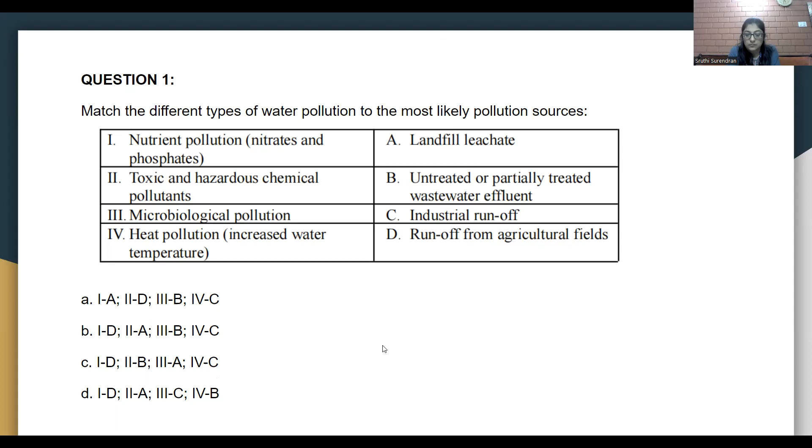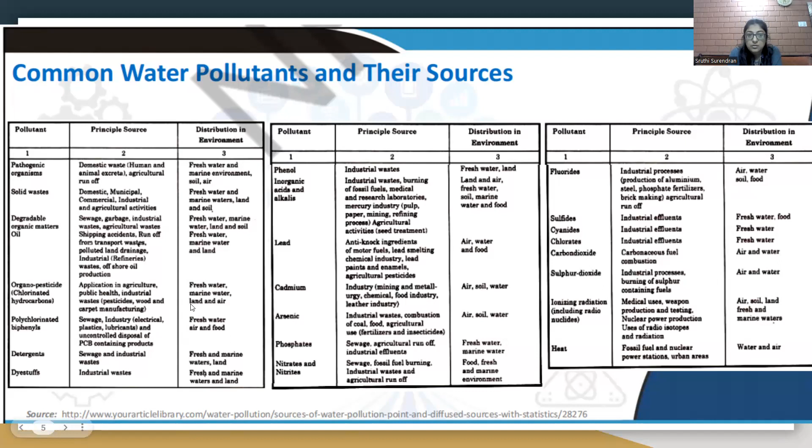Okay, I think I'll move on to the solution part of it. If you see here again in the lecture materials, there's a table of pollutants showing what is the source of pollutant and what kind of pollution it is causing. So nutrients like nitrates and phosphates are mainly coming from fertilizers and pesticides. So the main source of this pollution is the runoff from agricultural fields - when we use fertilizers in agricultural fields and it rains, this rainwater flows and washes off all these fertilizers, then flows into a river or nearby water body, resulting in pollution of the water body by the contents of these fertilizers, which most of the time is nitrates and phosphates. So the first option is going to be associated with D.

Toxic and hazardous chemical pollutants can result from landfill leachate. Landfill leachate occurs when there's a huge plot of area where all waste is dumped - plastic waste, food waste, whatever people collect from houses - accumulated in a particular plot. When it rains, this rainwater goes through the landfill, either seeping down into the soil or flowing out. This waste comprises a lot of chemicals which are hazardous and toxic. This is what is called leachate.

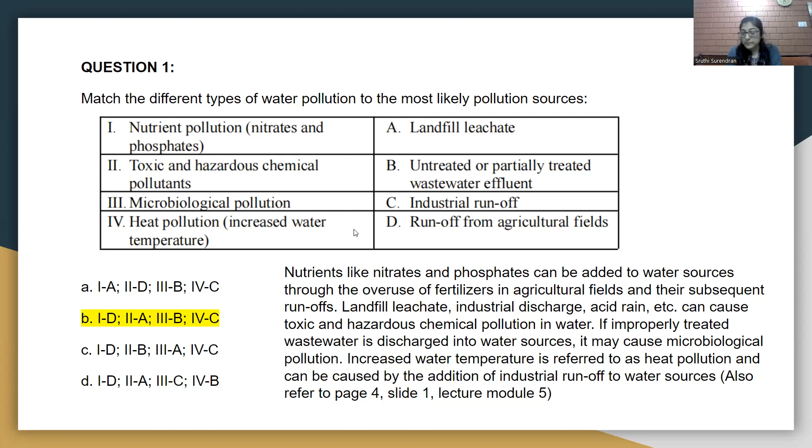So the third one is going to be B. Heat pollution is when the temperature of water increases because of some pollutant. This mainly occurs due to industrial runoff - when water is used as a coolant, it takes up a lot of heat. If this water is directly let out into a stream or river, it drastically changes the temperature at that point of release, affecting aquatic life. A drastic change in temperature is also a type of pollution. So heat pollution is associated with industrial runoff, and the option provided is B, which matches with all of them. I hope you understood the association.

The next one is: on the basis of degradation nature, water pollutants can be classified as? From this question, you can understand there are many bases for classification of water pollutants.

Kiran has said it's A. Any more answers? Vijay, Sangamitra, Ravi, go on, just make a guess, or if you know it, give the right answer. Okay, I don't see much answers coming up, so I'll move to the solution.

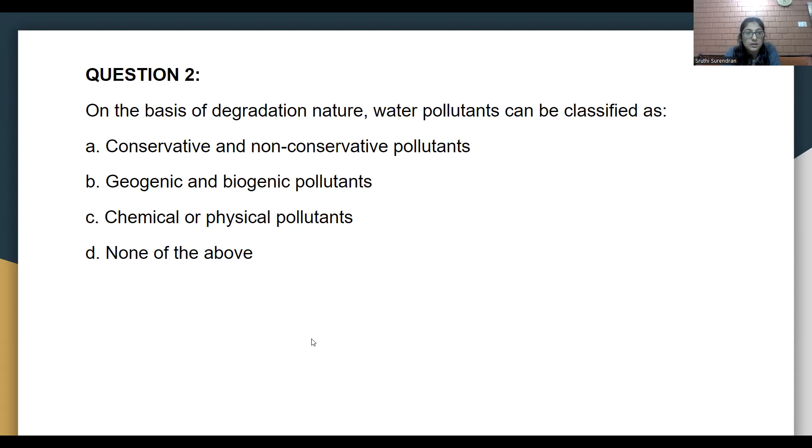Water pollutants are classified on certain bases. Here we are talking about three kinds of natures or types of water pollutants: one classified based on the sources of the pollutants, from where it is generating; the next based on the state or characteristics of the pollutant, whether it's physical, chemical, or biological; and the third is based on degradation nature, whether it gets disintegrated or does not disintegrate.

Based on pollutant sources, there are industrial pollutants resulting from industrial activities - heat pollution is one result of industrial pollutants, along with heavy metals and other contents coming from industries that also pollute water. Next are agricultural pollutants, with nutrient pollutants majorly falling under this category. Then there are urban pollutants, and landfill comes under this urban pollutants category.

Then there are natural pollutants which exist in nature itself - when existing in a moderate level or quantity, it's not a problem to the environment. But if it comes in excess of the required quantity, then it will also be considered a pollutant.

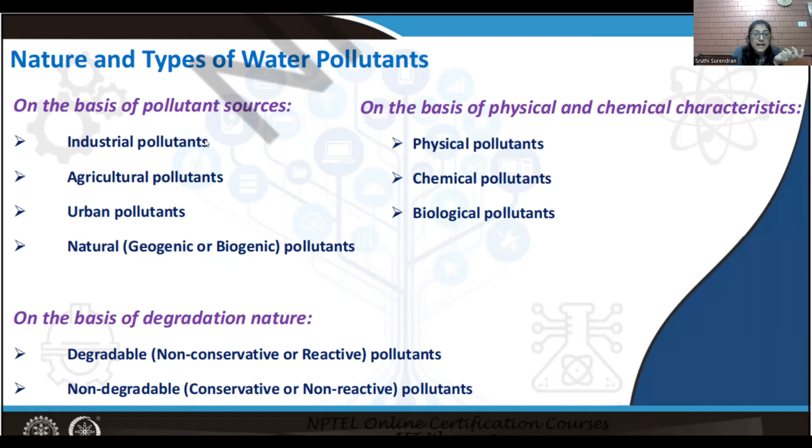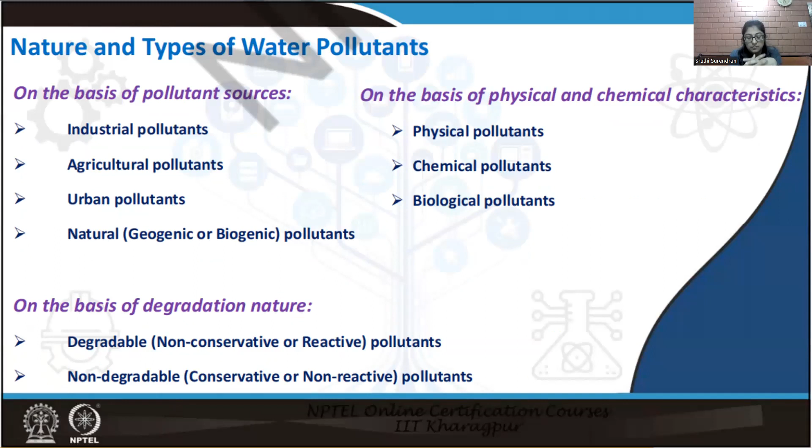And in that, there are two kinds: geogenic or biogenic. Our answer here will be on the basis of degradation - it's conservative and non-conservative pollutants. Here on the basis of degradation, they have given two: degradable, which can get disintegrated, and non-degradable, which will not get disintegrated easily. Geogenic refers to minerals that are naturally occurring, but if in excess quantity and affecting things harmfully, it comes under the pollutant category of natural substances.

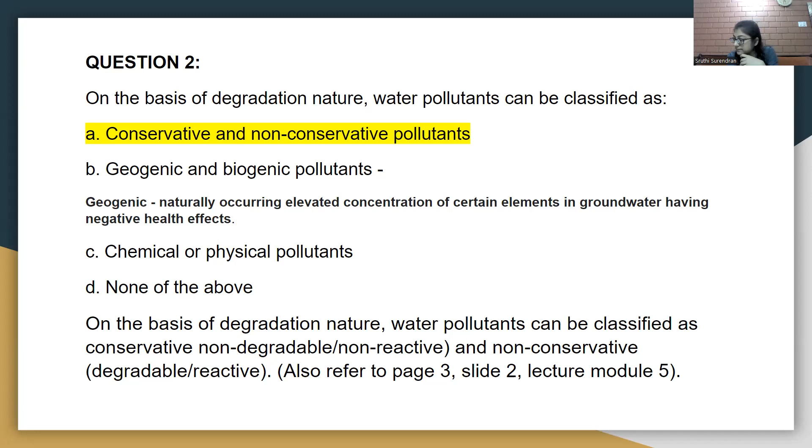So that was the second question. Moving on to the third question: major routes of exposure to water pollutants in humans are - how are humans exposed to water pollutants?

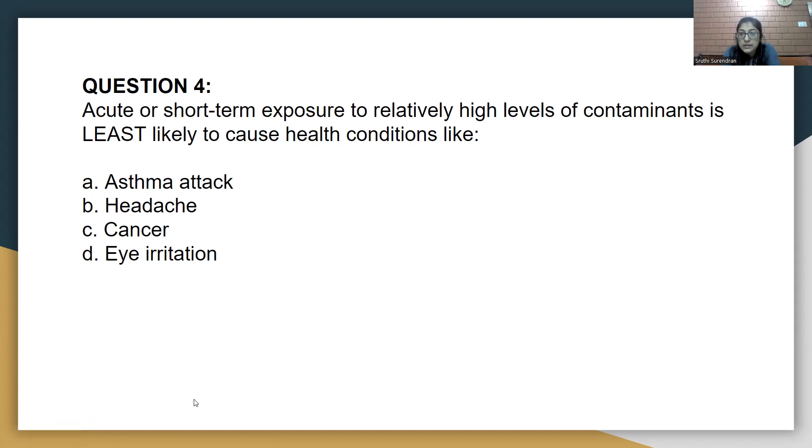Kiran and Sangamitra say it's C. No, sorry, Kiran says it's A. Sangamitra says it's C and Vijay says it's B. And Ravi is also there. Ravi, you can also say one answer. Okay, Ravi is not interested in saying the answer. So I think I'll go on to the solution.

So acute and chronic pollution are two categories where you are exposed: short-term exposure to high levels of contaminants, and long-term exposure to relatively low levels of contaminants. If you are exposed to high levels of contaminants for a short time, or chronically for a long time, it will definitely cause some disease. Chronic is when we take into consideration the long-term impact of small levels of contaminants that might cause health issues to us.

So short exposure, that is a few days or a few minutes, to a very high concentration of contaminant causes what are called acute effects. This can result in eye irritation, and in people already with breathing issues, it can cause an asthma attack or something like that. Chronic conditions are when we are exposed to a small level of a harmful contaminant for a very long period of time; it makes us susceptible to diseases like cancer and neurological and pulmonary issues, issues to the lungs and all.

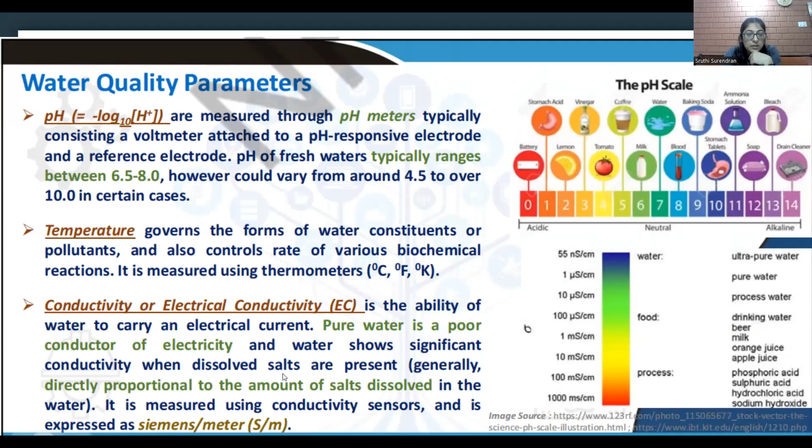So, just focusing on electrical conductivity, it is the ability of water to carry current. So, pure water doesn't have any ions in it. It doesn't have many minerals. So, it is usually a poor conductor of electricity. But if there are many dissolved minerals, dissolved ions in it, it starts having charges in it, so it will be able to conduct current through it, and this is measured using sensors, and the unit of measurement is Siemens per meter.

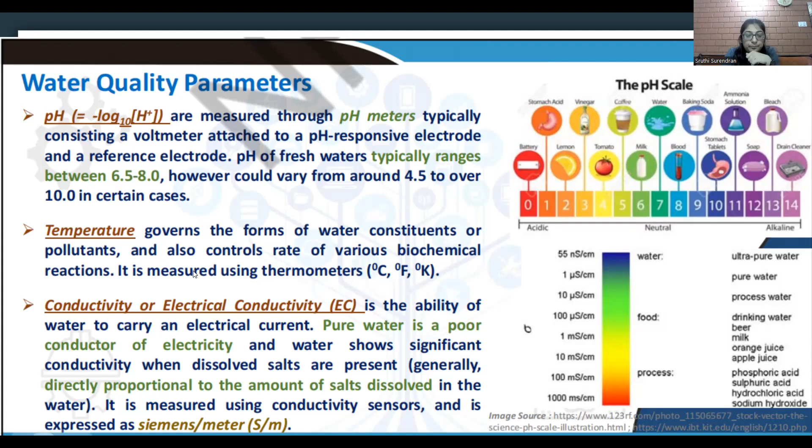So here they've said that pure water is a poor conductor of electricity, and if there are dissolved salts in it, it is going to be conducting some electricity, which is proportional to the amount of salt dissolved in it. So electrical conductivity is a water quality parameter, and maybe there's a scale over here, like you see. This is for the pH scale, but again, we'll know if it is very bad or not by understanding the electrical conductivity occurring in this specimen of water. So the answer is Siemens per meter.

Now, seventh question. A 10 ml pungent water sample requires 190 ml of pure water to make it odorless. Determine the threshold odor number of the water sample. So threshold odor number is a measurement of the odor of a water sample in a measurable form, and it's a very basic calculation that you require. Here Sangamitra said it's A. Very simple calculation. You just need to know how this is represented, and then you can calculate it in 2 seconds.

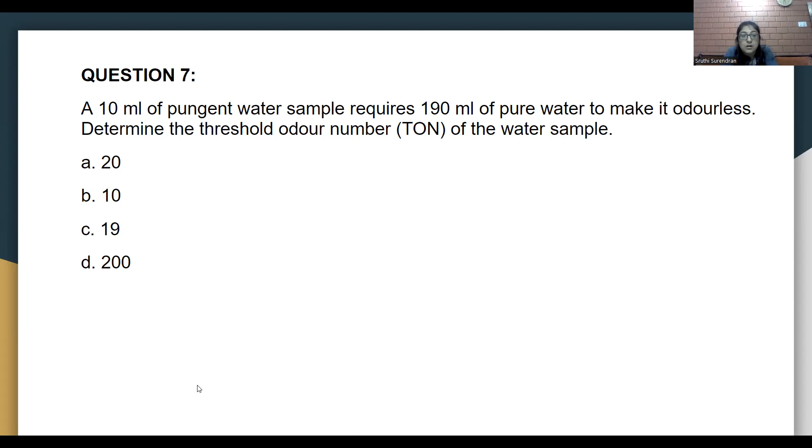Okay, so I don't see many answers coming up, so I'll move on to the solution. So like electrical conductivity, pH and everything, odor is measured using the threshold odor test, and it is represented in the form of threshold odor number. Threshold odor number is nothing but you have the volume of the sample that we require to test, and we have to add some amount of pure water to remove that odor.

So the amount of pure water required to make this smelly sample odorless, the volume of pure water needed to remove any odor, divided by the volume of the sample is what gives us the threshold odor number. So this is the formula for threshold odor number, as you see here. It is the volume of the sample plus volume of the pure water required to dilute the sample, divided by the volume of the sample.

So the volume of the sample given here is 10 ml of odour water, which is pungent water, meaning it's got a very sharp smell. And it requires 190 ml of pure water to make this 10 ml of water odourless. It requires 190 ml of pure water, so in total it will be 200. That divided by the volume of the sample gives us this value called TON, which is threshold odour number.

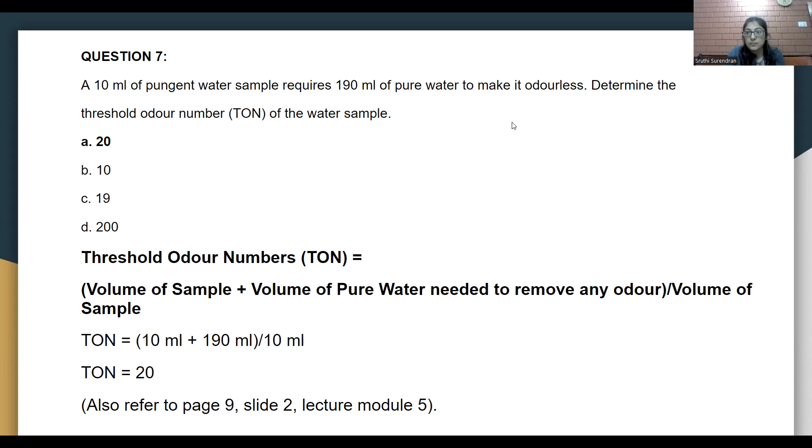So the answer, like Sangamitra and who else said? Okay, I don't remember. Yeah, Kiran also, Sangamitra also, Vijay also told. It is A, correct. Okay, we'll move on to the next question.

Now here there are some water quality parameters and their method of estimation. So go through all of the options and select the right option. Which water quality parameter can be tested in what way? So is it microbial water quality using most probable number and volatile solids using titration? Or is it alkalinity using titration and turbidity using scattered light intensity measured? Total solids using gravimetric analysis and hardness using titration with EDTA? Total solids using scattered intensity or microbial with most probable number? Two of them are given in each option. You have to select the option with the correct pair.

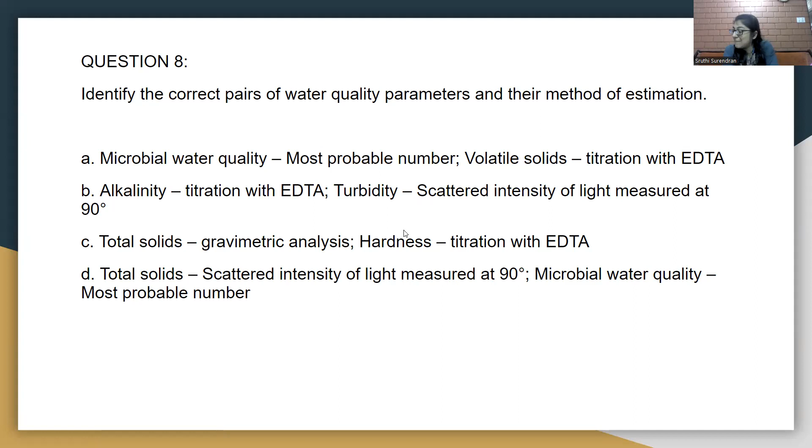Okay, so Sangamitra said it's C. Any more answers? Kiran has also said it's C. Okay, we'll move to the answer. So here are the options that have been given. I've just included what kind of tests and measurements there are and how they are represented.

So microbial water quality is done through a test called the E. coli test. In the E. coli test, with contaminated water the number increases, and then we can understand what the level of contamination in it is, and the measurement is expressed in terms of E. coli index or MPN, most probable number. So MPN is related to microbial water quality.

Now, total solids is another physical water quality parameter that is measured through the gravimetric method. The gravimetric method is nothing but we weigh the wet sample, then the dry sample, and then subtract the amount of water to know the total weight of the dry sample. Now, total solids comprise total suspended solids and total dissolved solids. So, the total suspended solids method uses Whatman filter paper. It is a filter, so whatever particles are suspended will remain on the filter paper, and everything else will go through. And then it is measured to understand how much total suspended solids there are.

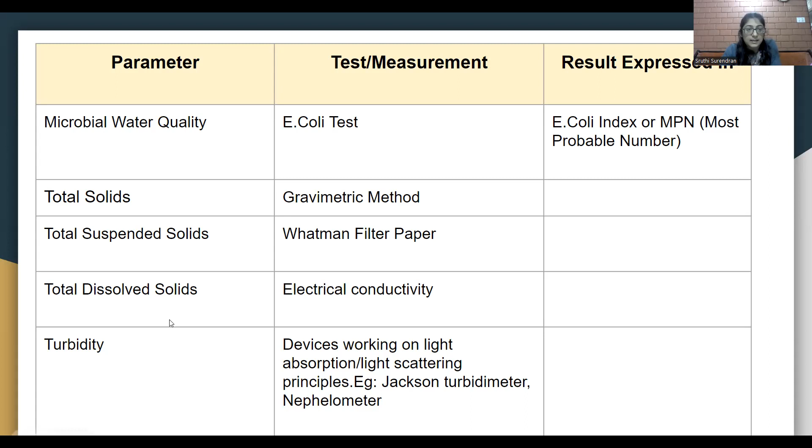So here the answer will be total solids. Total solids is done through gravimetric analysis, and hardness is done through titration with EDTA. The indicator used will be Eriochrome Black T. So when Eriochrome Black T is added to the hard water and it is titrated with EDTA, there will be a colour change, a blue-black colour change, and that is when we can measure the amount of hardness. Again, this will all be covered in future lectures. Yeah, so that's it.

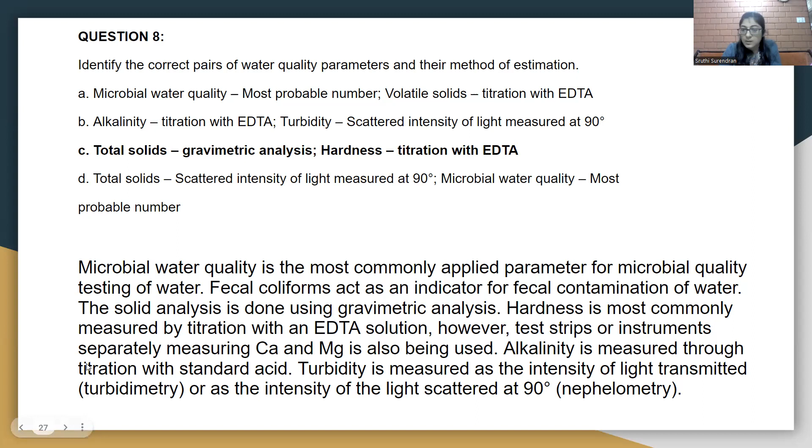Now moving on to the next question. Question 9. Which of the following statements are true or false regarding the aeration of water during the water treatment process? Precipitation of dissolved ions in raw water is facilitated through aeration. Turbidity and suspended solids in raw water are significantly reduced through aeration. Aeration is a major treatment process at the treatment plant for water withdrawn from groundwater sources. Okay, Kiran is saying it's B.

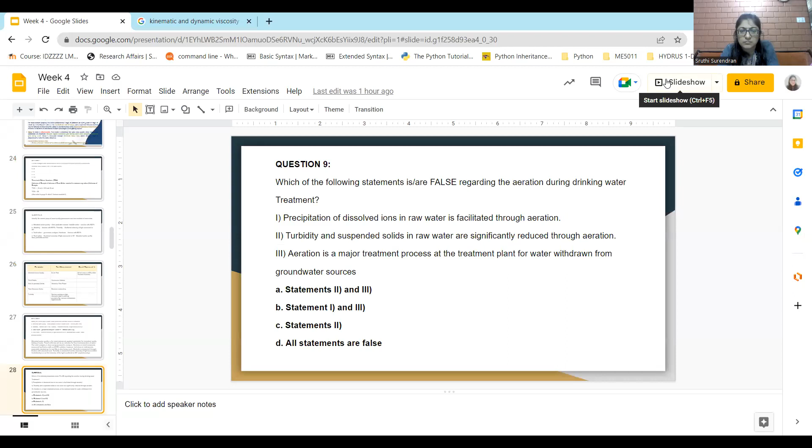One and three are true. Two is false. Okay. So it's option... It's okay. Then there seems to be some confusion. We'll see the solution soon.

Okay. So we'll move to the solution. Sangamitra has given B. This definitely seems to be some confusion because again, Sangamitra and Kiran has been... No, 1 and 3 are correct. Actually, by mistake, okay. Sure. Okay, so we'll go to the solution.

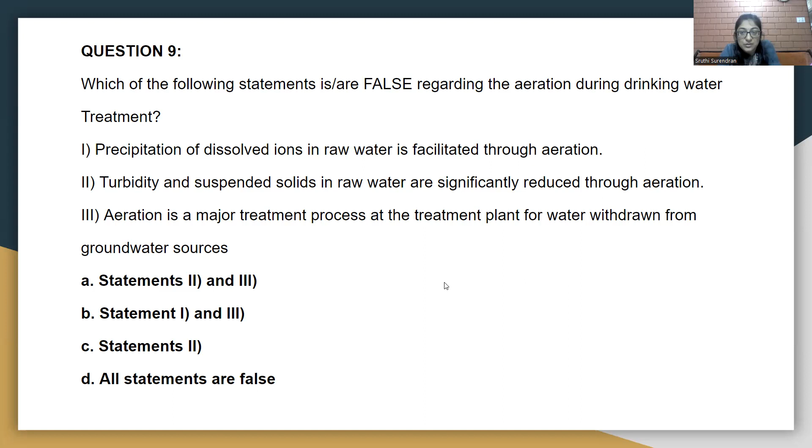So aeration is a process when air is made to come in contact with water as a part of the treatment process. So what happens here is some of the dissolved gases in this will come in contact with the oxygen in the air, and the oxidation process will occur. So they are exposed to air either in the form of droplets of water, or sometimes air bubbles are provided through this water and circulated through it so that it comes in contact with air. So here, if you are looking at the correct answer, it is statement 2.

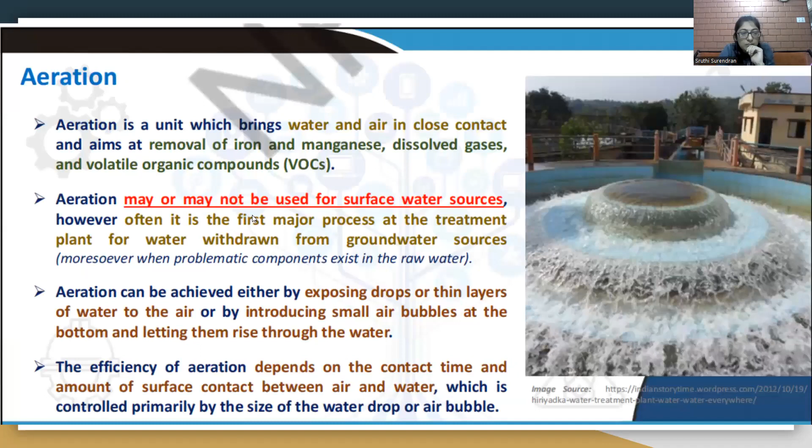It's supposed to be statement 2 and 3, because turbidity and suspended solids, when it comes in contact with air, what happens is it will form other compounds which will flock materials. I mean, it will come in contact with air, oxidation will occur, and it will start falling down. And aeration again is required for process, because wait, I'm sorry, my bad.

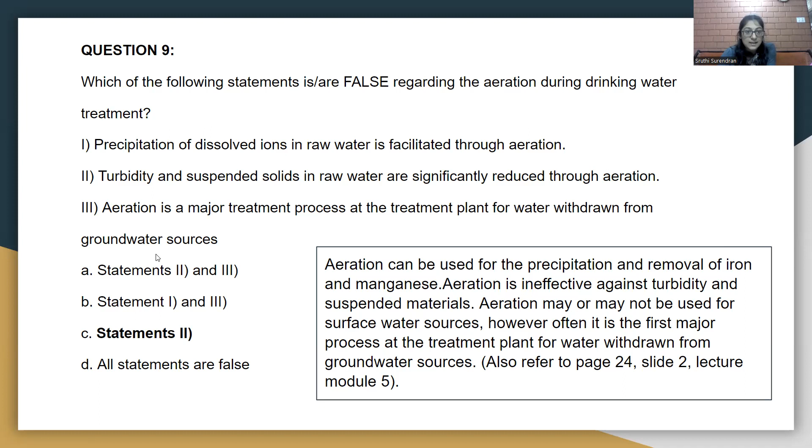It's nice. Okay, now moving on to the 10th question. The mechanism used to determine heavy metals in water is flame atomic absorption, inductively coupled plasma, mass spectrometry, or is it all of the above?

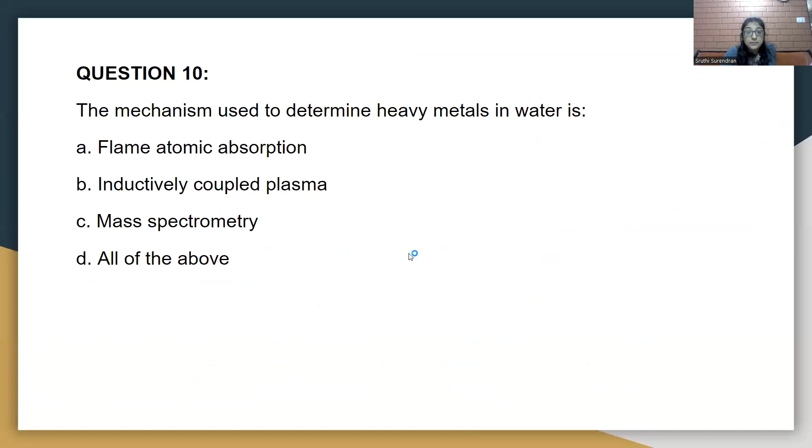Okay, I think I'll move to the answer. So here they have asked about mechanism to determine heavy metals. So in metals itself, some of the methods used to determine them are flame atomic absorption, electrothermal atomic absorption, inductively coupled plasma, mass spectrometry. If you ask me what the methods are, even I'm not very sure what are the principles of the method. But I think again, it will be good to just be familiar with these terms and probably just go through and try Googling or something. I'm not familiar with what these methods are.

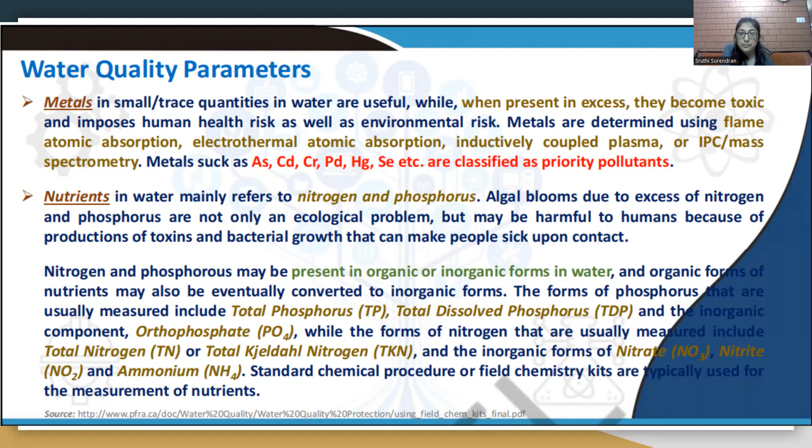Flame atomic absorption. Anyways, these are the tests that are done for understanding what is the amount of heavy metals in the water sample. So all of the above is the answer. Flame atomic absorption, inductively coupled plasma, and mass spectrometry. All of these three methods are used to determine heavy metals in water.

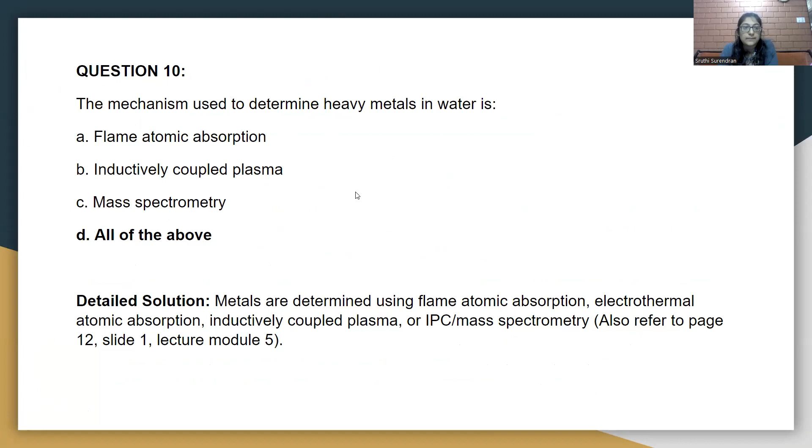Now the 11th question, Winkler method or Azide-Winkler method are the most commonly used method to determine what water quality parameter. Is it dissolved oxygen, chemical oxygen demand, biological oxygen demand, or all of the above? Sangamitra says it's A. Need more answers? Kiran says it's A. Okay.

Okay, so there are no more answers.

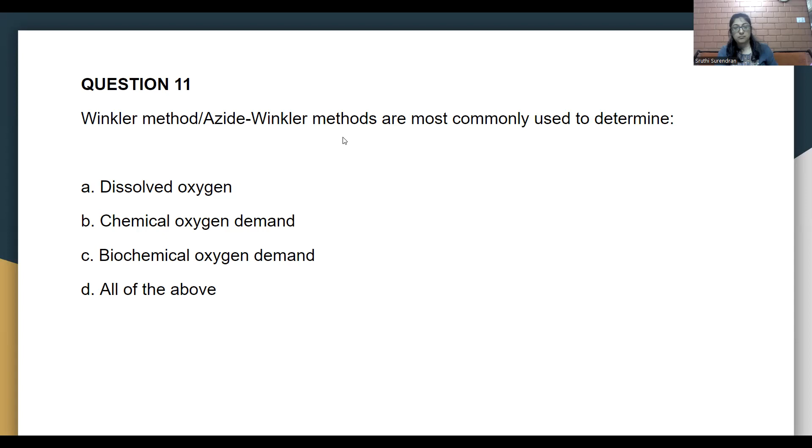So dissolved oxygen is a very important water quality parameter, particularly when we come to wastewater treatment. But again, like I said, in good quality water, the amount of dissolved oxygen is going to be more. And when the quality of water deteriorates, the amount of oxygen dissolved is going to be less, because mostly what happens is the microorganisms or whatever chemicals, if they require oxygen, they're going to take up the oxygen in the water and get oxidized.

In the end, the amount of oxygen is going to get reduced in the water. So for testing this, the method used here can be the Winkler method or Azide-Winkler method, traditional laboratory methods used for understanding the amount of dissolved oxygen in water. Now, biological oxygen demand is again a measure of how much dissolved oxygen has reduced. Even COD is also one measurement of it. How we calculate BOD, how we calculate COD, and the relation between BOD and COD will be taken in future lectures.

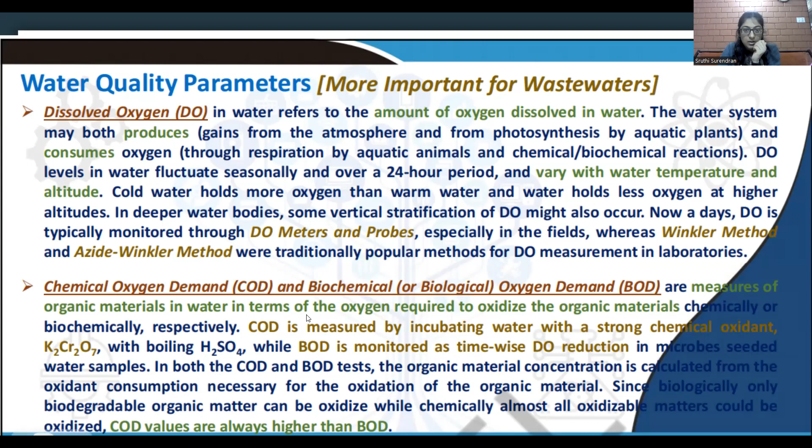So the answer for this question would be dissolved oxygen. This makes use of a titrant called sodium thiosulfate. When water with dissolved oxygen is mixed, it is going to be yellow in color. And then when you add the starch indicator, this color is going to change. That is the point when you will measure how much titrant is required and calculate the dissolved oxygen concentration. So the name of the method used here is the Winkler method.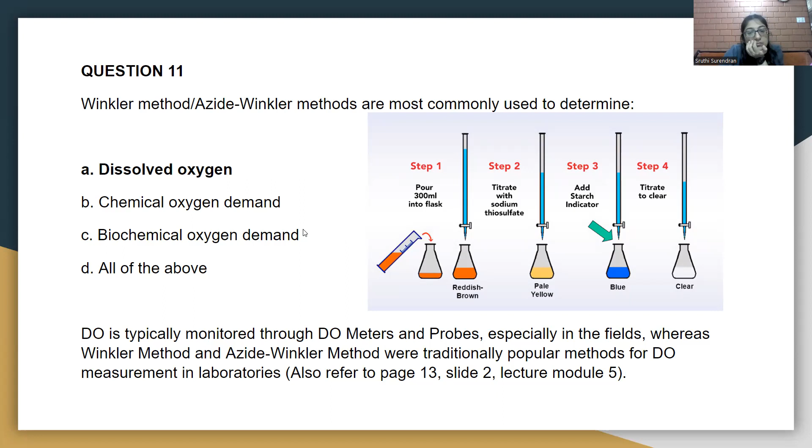This is also one very repetitive question that is mostly asked in all of the state and central government exams: what is the test and what parameter does it measure? And one common test is this Winkler method.

So question 12. A drastic reduction in settling velocity is typically observed in which zone of settling? So from here you can understand there are 4 types of settling, occurring in 4 layers of the water treatment process. When you're talking about settling, it is definitely going to be the sedimentation chamber. So what type of settling will result in a drastic reduction in the settling velocity?

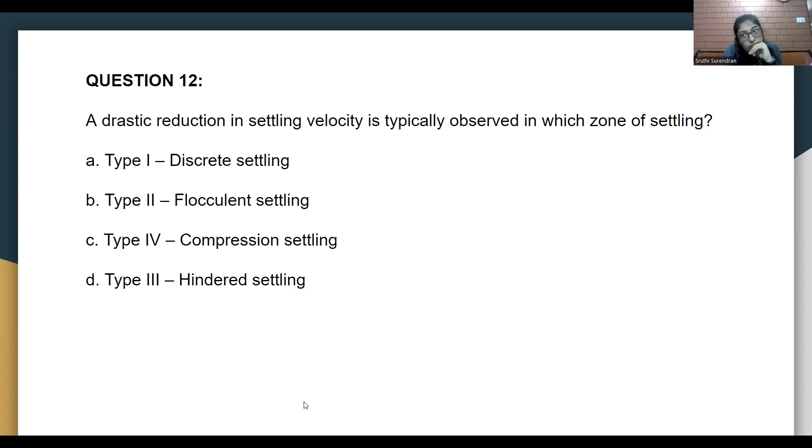Says it's B. Okay, I'll move on to the answer.

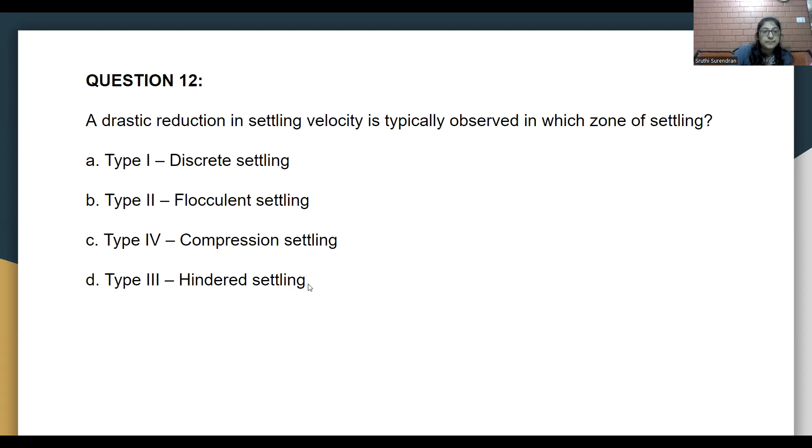So there are 4 types of settling, like I said. First is discrete settling. Second is flocculent settling. Third is hindered settling. And fourth is compression settling. Okay, got one more answer. Sangamitra also says it's B.

But here, as you can see, the first type of settling occurs when low solid concentration exists, and particles settle without any interactions. This is called discrete settling. In type 2, the flocculated particles increase in size, because of which they settle faster. In hindered settling, these particles impact the settling of other particles. Through collision there's some energy reduction, and because of that impact, the settling is a little more restricted.

And in the fourth type, particle concentration is so high that because of collision or some inter-particle mechanisms, the settling velocity is going to reduce. So it is in the last, type 4 settling, that the settling velocity drastically reduces. In the second one, the settling velocity increases more than in discrete settling.

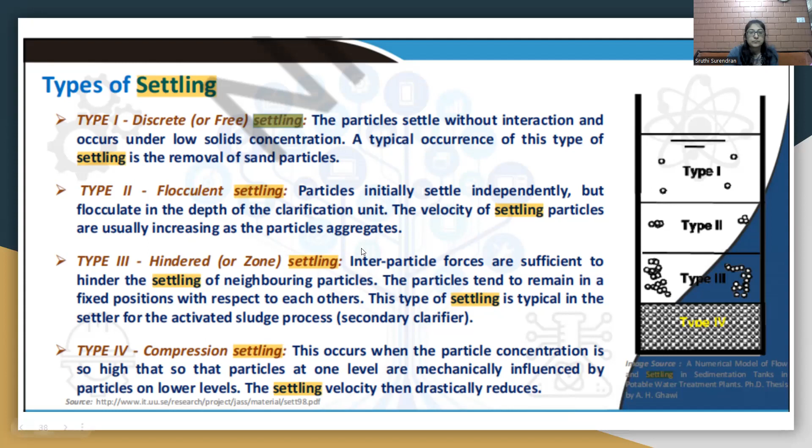So this is also a nice, confusing type of question where you need to understand what kind of mechanism is occurring in what type of settling. So the answer would be type 4, compression settling. Type 1 is discrete, type 2 is flocculent, type 3 is hindered, and type 4 is compression settling. I don't know why they put the C option as 4, maybe again to confuse. Like we got confused earlier with which is not and which is, giving more attention to the options and the question can help us not lose a mark. So question 12, type 4, compression settling drastically reduces the settling velocity of a particle.

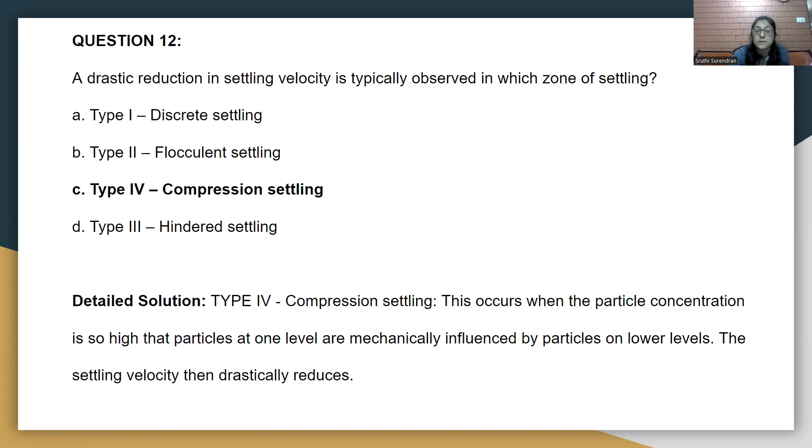Now questions 13 to 15 are numerical. I would like all of you to take time and try it, even if you don't know the methodology. It can be done because it's all based on units of volume, area, and everything. So please give it a shot. Maybe I can also give you the formula that is required. This question is talking about a 5-meter deep clarifier. A clarifier is nothing but a sedimentation tank in a water treatment plant.

It is required to treat 25 million liters per day of raw water. The volume of the clarifier is given, the depth of the clarifier is also given, and the volume of the clarifier is given. Its length to width ratio, that is the horizontal length and the width ratio, is given. Now they have also given the density value, which is 10 to the power minus 3 Newton second per meter square, and the dynamic viscosity of water, which is 1000 kilogram per meter cube, and the specific gravity of the particles which are there in the settling tank, which is required to be settled.

Now what you are supposed to find is the overflow rate. I can explain what the overflow rate is, and then you can try doing the question. You require to determine the overflow rate, determine the diameter of the particle that can be removed with 100% efficiency, and also the horizontal velocity of the particle.

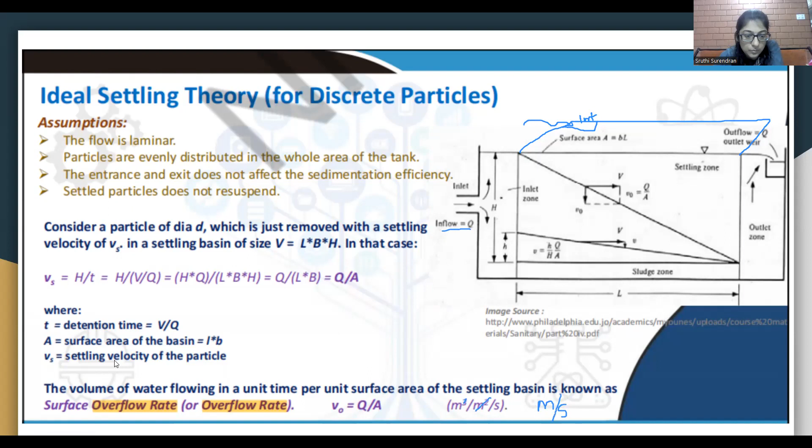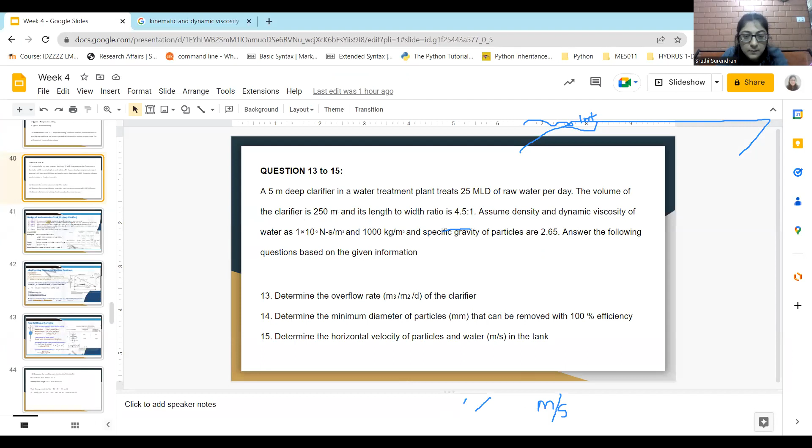Now let's go back to the question and calculate the surface overflow rate. You can please do it. This would be a good exercise for you, and there are more problems coming in this category itself. So go back to the question and do it. This is the question here. Just try doing it and giving the answer. It will be a good exercise.

So they have asked you to find the overflow rate, and the overflow rate is going to be in meter cube per meter square per day. Like I said, it is the discharge divided by the area. We have the discharge over here, and we can also calculate the area over here. The data is there, so just calculate the first question's answer and let me know.

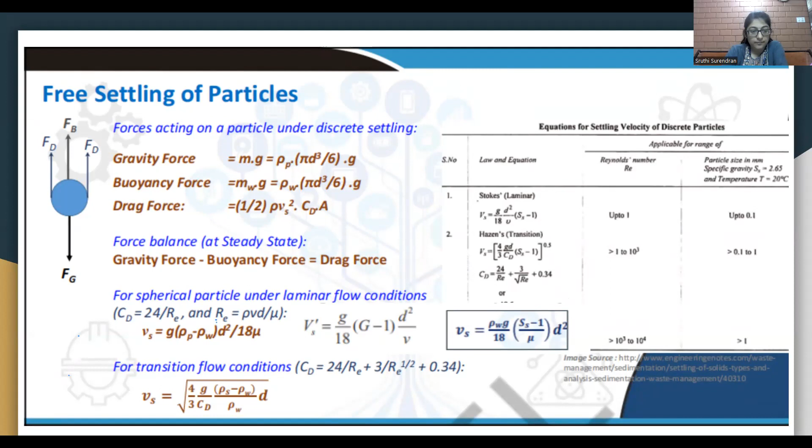If anyone has got an idea of what I said just now, then it would be good for you to calculate and find the solution for this question. Will you be able to do it? Do you want me to move on with the solution, or would you be trying to do it? Is anyone trying to find out, or should I move on with solution?

I'm trying, but confused regarding the units actually. Okay, so shall I wait for you to finish the answer? No, you continue.

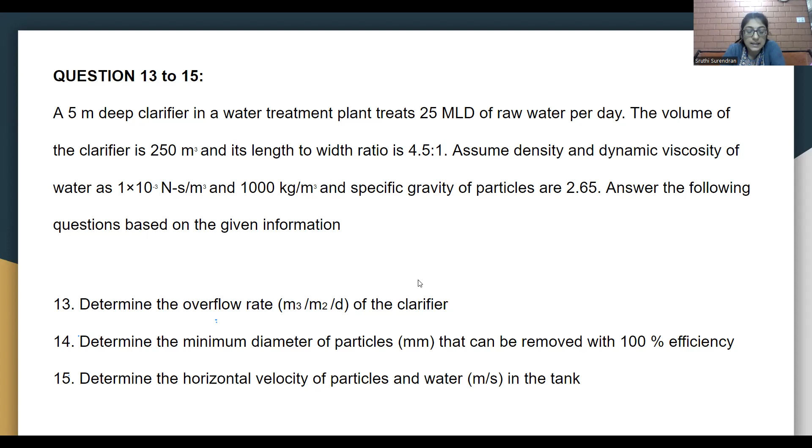Okay, so here, like I said, they have asked to find the minimum diameter of the particle, with which the settling will take 100% of settling will occur. Now, for that, like I said, we have some quantities. Using this equation, we can find out the diameter. So this is the solution.

The flow through the clarifier, we had found out it is 25 into 10 to the power 3 meter cube per day. Area we found out, and we found out the overflow velocity, which is this 500 meter cube per meter square per day. Now, using that is equal to 500 meter per day, because if you cancel out the units, meter cube divided by meter square, you are going to get meter per day.

So we have the velocity over here, the critical velocity, which is equal to the surface flow rate, which is 500 meter per day. If that is converted to meter per second, this is the value we are getting.

Now, like I said, what was the condition for 100% efficiency to occur? The condition for 100% efficiency to occur is the settling velocity of the particle should be equal to or greater than the critical speed of the tank or the surface overflow rate. So this is the condition over here that needs to be fulfilled.

So in place of the settling velocity, we have already the surface overflow rate. So we'll put the 500, 0.005787 value in here, multiplied by using this formula: density of water into G into specific gravity minus 1, into D square, divided by 18 mu.

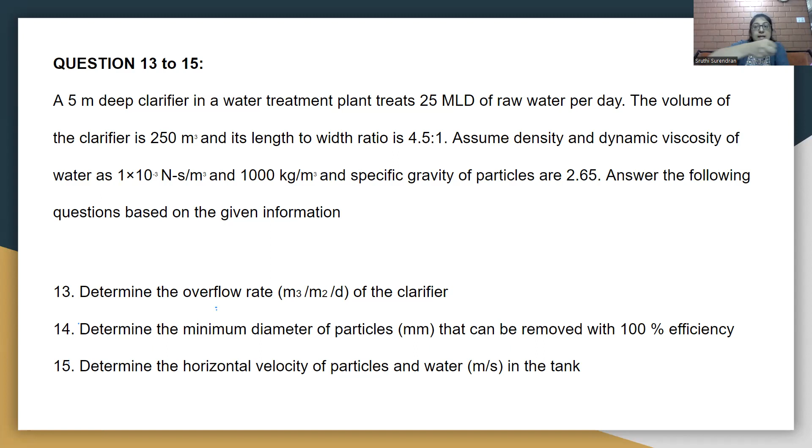Now the 15th question was to determine the horizontal velocity of the particle. Settling velocity is vertical, that is how it goes down and settles. Now they want to find what is the horizontal velocity of the particle and water in the tank. With what velocity is water flowing through the tank, and that velocity helps in carrying the particles across the tank. Ideally, we require the particles to settle, but since it is entering the tank and the water is going out, it will also have a horizontal velocity.

Since it's a vector quantity, it will have a vertical component and a horizontal component also. So here they are asking us to find the horizontal velocity of particles and water in the tank. Now, how do we calculate that? What information will we require? We'll require the length of the tank, because the water is going to travel like this and go out. So we'll require the length of the tank. But here we have only been provided with the information that the length to width ratio is 4.5:1.

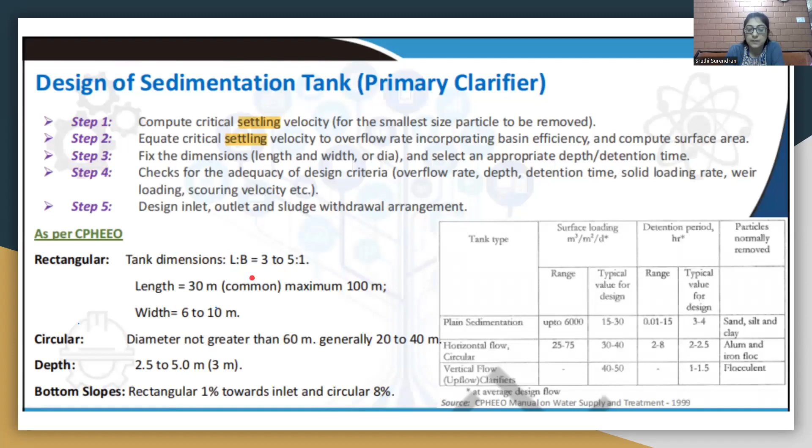So here what information is given? Length to width ratio has been given. Usually for tank dimensions, length to breadth ratio will be given, and here it is given as 4.5:1. So how do we get the surface area from that?

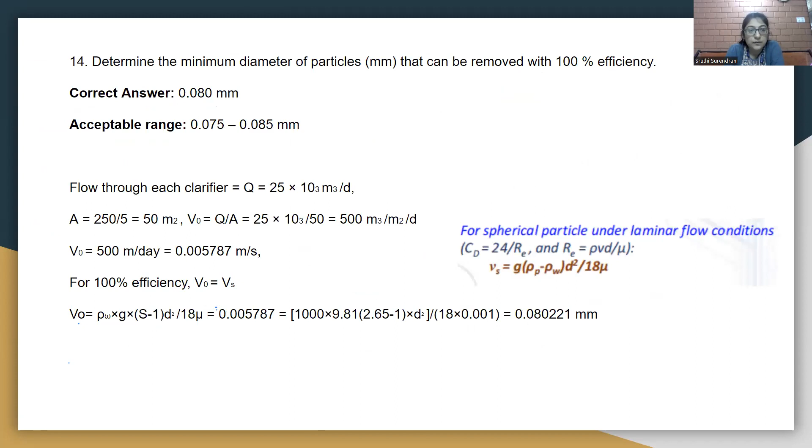I'm sorry, there's a confusion here. Yeah, we need the length and the depth of the tank. Now we want the water to be traveling in the horizontal direction. So the dimensions of importance here are the length of the tank and the depth of the tank. Since water is going to go like this, we have to know the depth of the tank and length of the tank. So here we have the depth also, we have the length also.

We are going to divide the flow rate. Flow rate is given as 25 into 10 to the power 3, divided by the breadth we got here, 3.3. Oh no, there's some confusion in that.

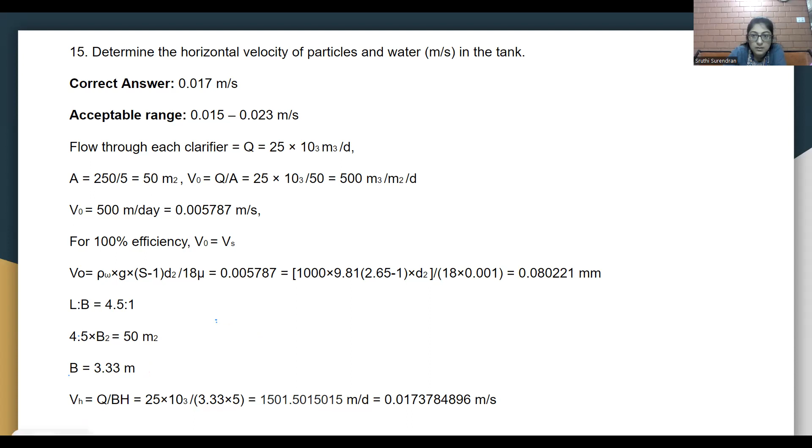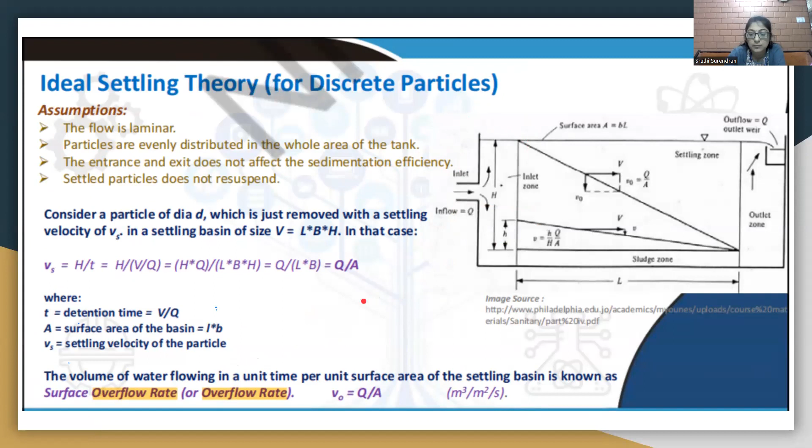So if you see the tank over here, this water is going to go like this. So we need the cross-sectional area of the tank, that is the breadth into the depth of the tank, and for that purpose we got the breadth and we are dividing the discharge by the breadth into depth, and that will give us this value of velocity. So this is going to be the horizontal velocity.

So this problem is one standard problem that is always asked. Discharge will be given, volume discharge rate, that is meter cube per day, meter cube per second, whatever is the rate will be given, volume of the tank will be given, depth of the tank will be given, area ratio, length to breadth ratio will be given. They will give the specific gravity of the particle that is going to enter the tank, dynamic viscosity or kinematic viscosity, either of the values will be given.

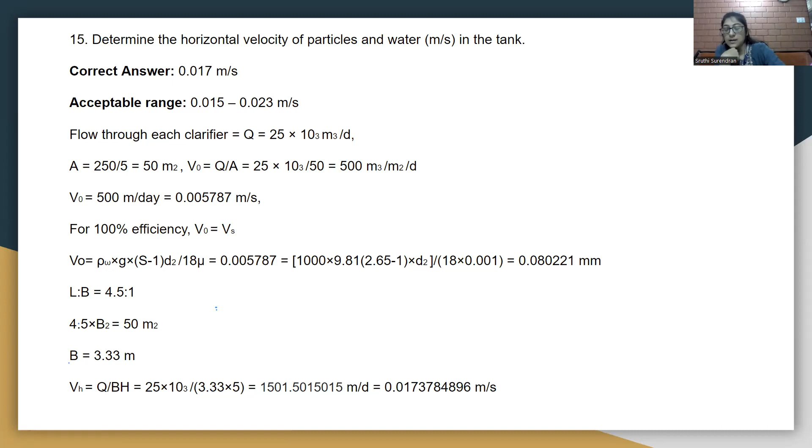We will have to calculate the settling velocity, the surface overflow rate, horizontal velocity, and what is the diameter of the particle with a certain settling velocity, and with what efficiency it is going to be settled. So these are some of the important formulas that you need. This condition is one important condition that you need to keep in mind. Settling velocity of the particle should be greater than or equal to the surface overflow rate, then only you get 100% efficiency.

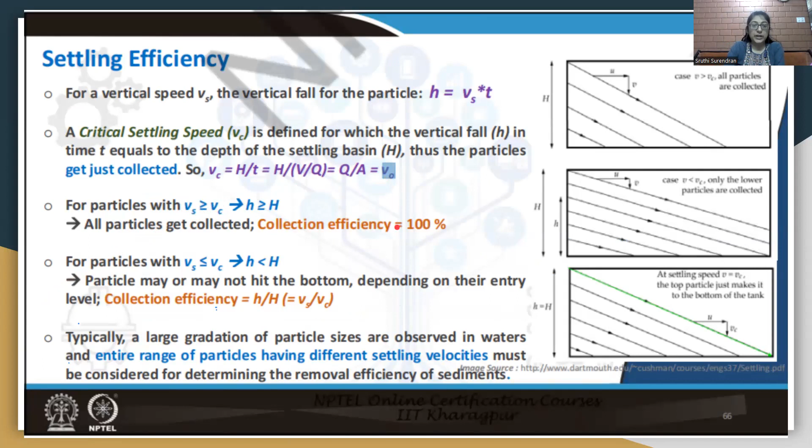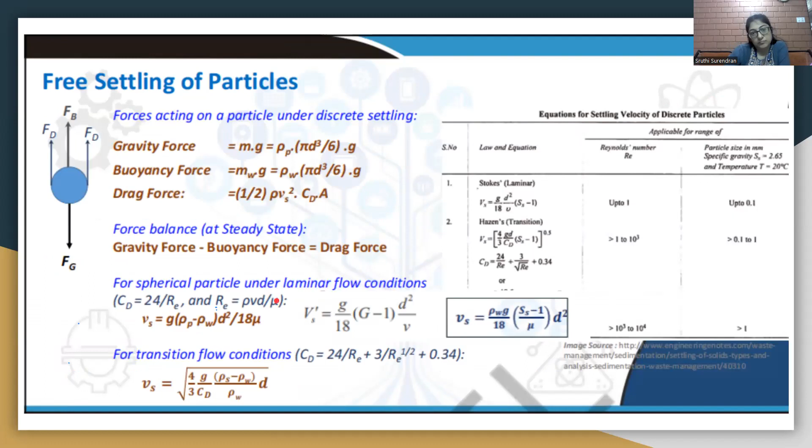And this formula, the Stokes law formula, which is giving us the settling velocity of the particle, and the surface overflow rate formula, that is giving us the discharge rate divided by the surface area, which is breadth into length. Now that was the 13 to 15 question.

Now again we will do one question which is related to this. I think Sangamitra, if you got a grip over it, you can try this question. There are more questions that are coming. If you do it again, you can practice here.

An ideal horizontal flow settling basin. Again, a tank is given, the depth is given, surface area is already given, rate is given as 8,000 meter cube per day at a temperature of 20 degrees Celsius, when the density of water is going to be 1000 kilogram per meter cube. Assuming Stokes law to be valid, that is, we can use that formula of settling velocity, what proportion percentage of spherical sand particles of this much size diameter with a specific gravity will be removed? What is the chance of it being removed?

Percentage of spherical, that is, they're asking for the efficiency over here. So in order to know the efficiency, we should know two quantities. One is the settling velocity and one is the surface overflow rate. I think pretty easily we can calculate the surface overflow rate. Using the Stokes law, we can calculate the settling velocity, because they've given us the diameter of the particle, specific gravity of the particle.

This is the dynamic viscosity. This value over here is giving us the dynamic viscosity. Unit is wrong. It should be Newton second per meter square.

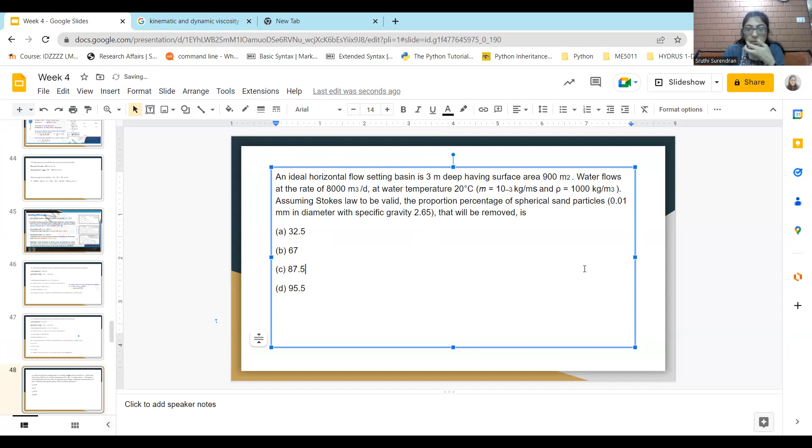The dynamic viscosity unit I had given over here was wrong. It is kilogram per meter second, not kilogram per meter cube.

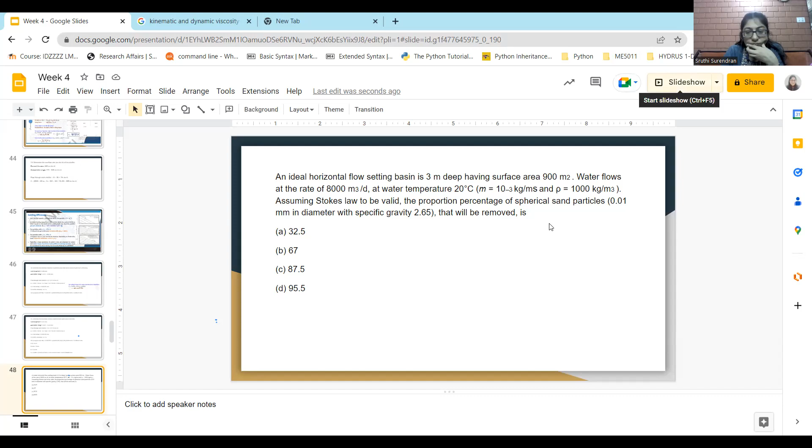So Sangamitra and the others, when you want me to go on with the answer, just let me know. Kiran's okay. Sangamitra, shall I wait? Yes, I'm doing, but you can continue. No, if you want me to wait, I can wait. I'll wait for maybe one or two more minutes and then I'll move on to the answer. Okay.

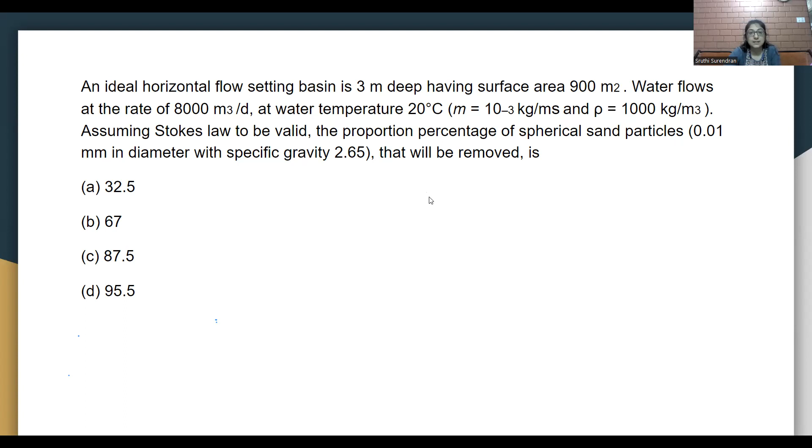So here again, they have said that the particle is following Stokes law. So we can say the settling velocity of the particle using this formula, gd² by 18. Here they have represented it in kinematic viscosity, which we can represent in dynamic viscosity because we know the density of water. So it is gd² by 18μ into the specific gravity minus 1 into the density of water.

So acceleration due to gravity g is 9.81 meter per second square. Specific gravity is given. Diameter of the particle is given as 0.01 millimeter. Now we should be careful because here we are going to get the answer in meter per second, but the diameter is given as millimeter. So we should always be careful that we convert it to meter before substituting it in the formula. And then dynamic viscosity is given.

We can either find the kinematic viscosity and use it in this formula, or we can directly put it in the second formula that is being shown here. If we have the dynamic viscosity, we can use it in this formula, or we can convert this value to kinematic viscosity. Here they have done that, but it's not necessary we follow this method. We can actually directly substitute the dynamic viscosity and do the problem.

So then they found out the settling velocity by substituting g value, 18, 2.65 minus 1, into the d square. Again, if you see here, it is given in mm, so they have converted it to meter and taken the square of it. Always remember to take the square of the diameter. Don't forget that formula. Divided by 10 to the power minus 6 is the kinematic viscosity. Now they got the settling velocity as 0.899 into 10 to the power minus 4 meter per second.

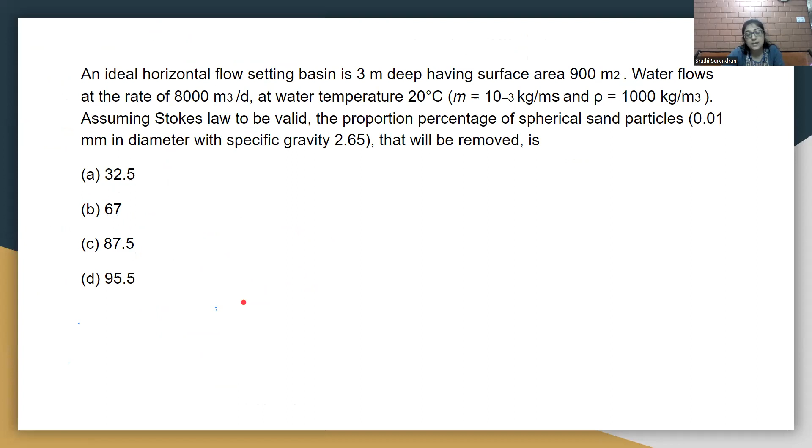Now we are supposed to be calculating the surface overflow rate. Surface overflow rate is given by Q by the area of the tank. Q water flow rate is 8000 divided by the surface area of the tank, given as 900. So if you do that, we'll get the V naught value. Here they have found out the volume of the tank by water flow rate, which is giving us a settling time. That is, volume of the tank is surface area into depth, divided by 8000, giving us the settling time.

So if we know the efficiency with which the particle is getting, I think I'll do the calculation over here. That will be more useful. Did you understand, Sangamitra? I don't have an option to write the calculation here, otherwise I would have done that. I'll do one thing. I will do it in the alternate way and put it in the slide. All of you just do it on your own also, by using the overflow rate. This is another way of doing it.

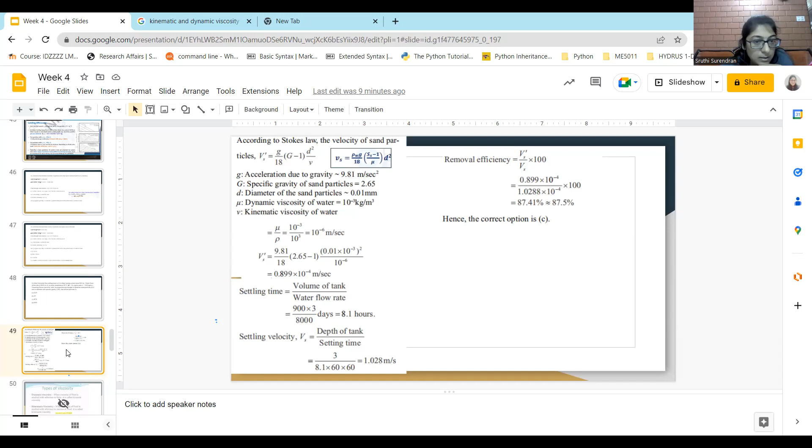Here they have asked for the diameter of the tank. So we have a total rate. We have already one tank, but then we want to separate it into 2 different tanks. So how do we get the diameter of the tank that needs to be constructed? I think this will be a little confusing to you, so I'll just move on to the answer because I'm running a little bit

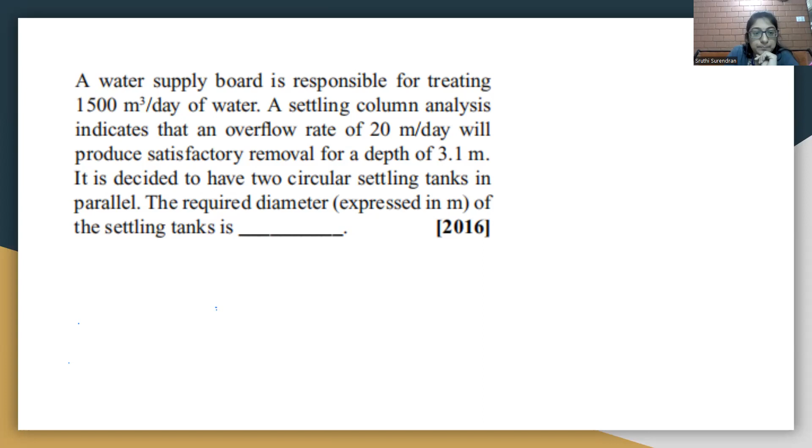behind time also. So here what they're asking is the area of the settling tank required is 75 meters square. How they got it is the discharge rate divided by the surface overflow rate is actually giving us the area of the tank that is required to be built. Now here also we require that same area. We don't require the same volume.

What you need to think about here is the important parameter for a settling tank is the surface area of it and the depth. It's not the volume of the tank in general. So if you have a particular surface area only, we will get a particular overflow rate, and with that overflow rate only we can decide how much the tank is capable of settling the particles. So if you get the area over here itself, just divide that area by 2. So each tank should have an area of 37.5 meters square.

Since here it is a circular tank that is being talked about, we are going to use this formula pi d square by 4 to find out the diameter of each tank that is required to be built. So again, in a settling tank, what is important is the surface area. That is what is going to decide how well the particles are going to get settled, by calculating the surface overflow rate.

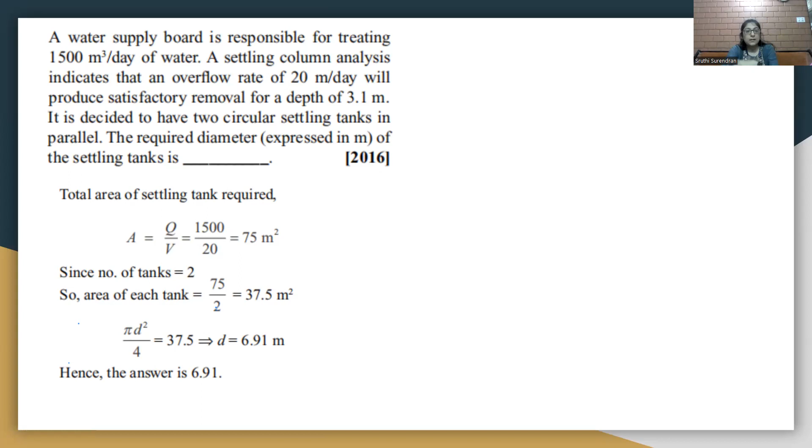So once you go through the lecture and you go through all these problems again and again, you will be able to familiarize with this surface overflow rate, settling velocity. All these terms will get familiar once you do all these problems. It is sufficient if you do the problems that have been discussed here itself. And also in the lecture, professor has provided some practical problems. Just go through all of that, and that will be enough. One value will be given, find the other value, so it is not going to be really difficult.

I think this is a pretty... B or D. Okay. D. Vijay said it's D. Okay, I'll move on to the answer.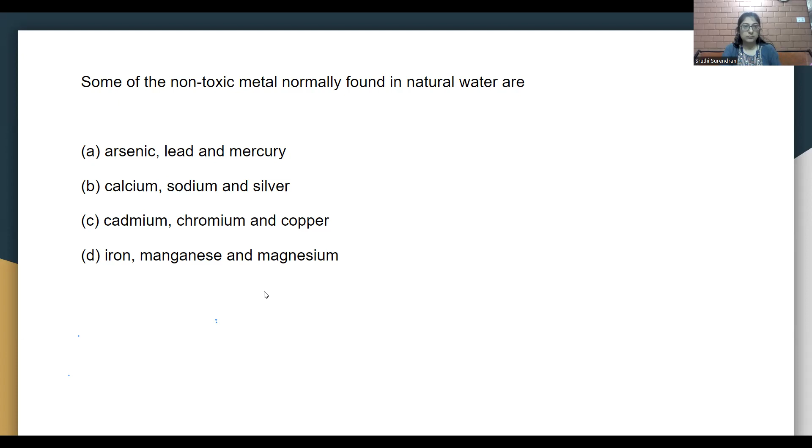So non-toxic metals normally found in natural water are iron, manganese and magnesium. There are certain minerals required by the body for fluid balance and growth. They are mainly classified into 4 groups: macro minerals, minerals required only in trace amounts, a subcategory of the trace amounts, and toxic metals. This classification is based on what minerals our human body requires and how much of it.

Macro minerals are required in large quantity, like calcium, magnesium, sodium, potassium, phosphorus, iron, copper, zinc and sulfur. Minerals like chromium, selenium, boron, bromine are required only in trace amounts. Even less than that are minerals like fluorine and arsenic. And what our body should never contain is beryllium, mercury, lead, cadmium, aluminium, antimony, bismuth, barium, uranium. These are very toxic to us.

Again, some of the minerals discussed, like fluorine: if excess fluoride is in the body, we will have some diseases, and if fluoride goes in less amount, we will also get some diseases. Arsenic in high quantities is harmful to our body, but in small quantities it is not going to do harm. But essentially, what we require are minerals like iron, manganese, and magnesium, which are non-toxic to our body.

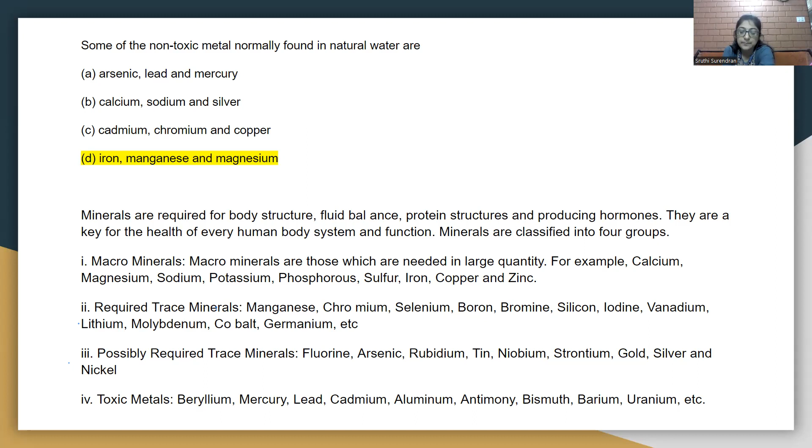Now, next, another question. Most important water quality parameter for domestic use of water is. Here, the highlight is domestic use of water. What is the most important water quality parameter for domestic use? It includes bathing, cooking, washing, drinking. What water quality parameter should we give?

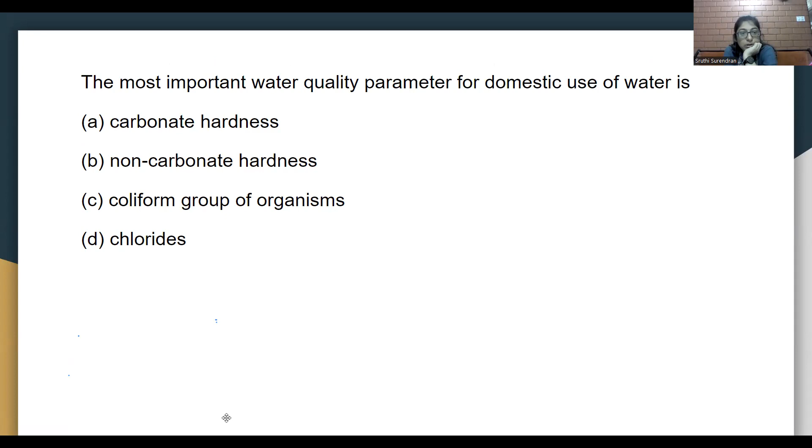Let me just say C. Any more answers? Kiran also says it's C. Okay, go on. So again, like you guys said, it is correct: coliform. That is, our main requirement should be that it should not have any microorganisms. That is going to give us diseases like cholera and stuff, contaminated water. So the most important water quality parameter for domestic uses is a check on the coliform group of organisms.

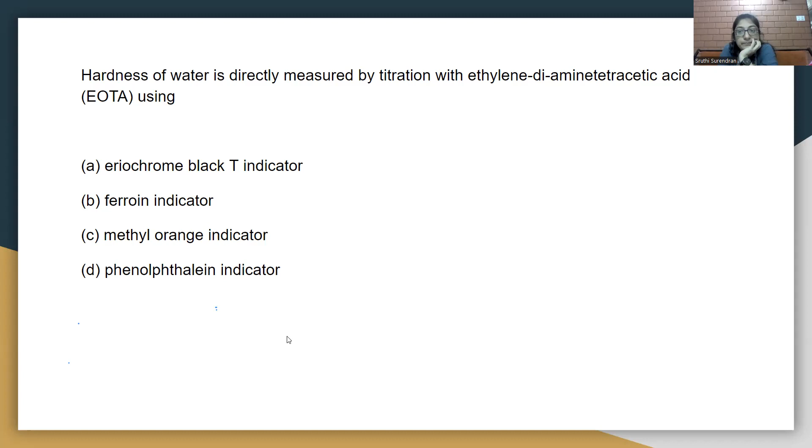Now, hardness of water is directly measured by titration with ethylene diamine tetraacetic acid. It is EDTA, not EOTA. Sorry for the error. What is the indicator in this case? This is the titrant. What is the indicator in this case is the question. Yeah, Sangamita said it's A. I had discussed it, I think, in earlier slides or not. Okay. Shall we move on to the answer?

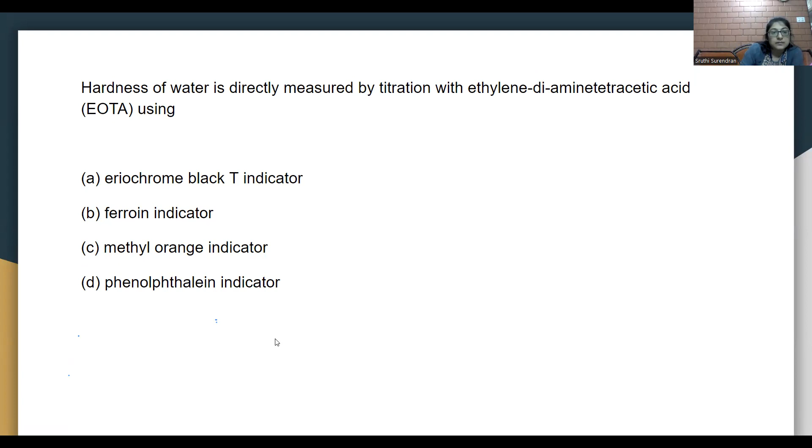So it's correct, Eriochrome Black T indicator. Now there are titration based tests to understand what is the quality of water. So hardness is done using EDTA as the titrant and Eriochrome Black T as the indicator. Again, here you can see methyl orange indicator. This is used for detecting the pH levels of water. And also phenolphthalein indicator is used, another indicator for pH. This will help us in knowing if the water is alkaline or not when it changes color to pink.

So hardness here is measured using the titration method, using a titrant EDTA with Eriochrome Black T as an indicator. This is also one very common question that comes up in a lot of exams. So something that you should for sure know.

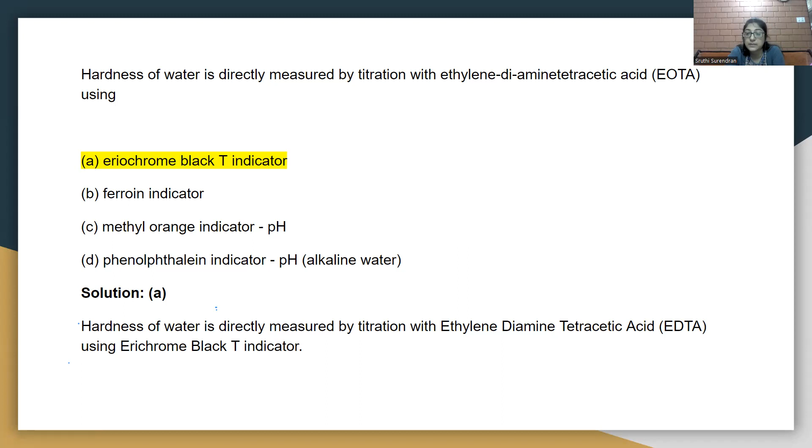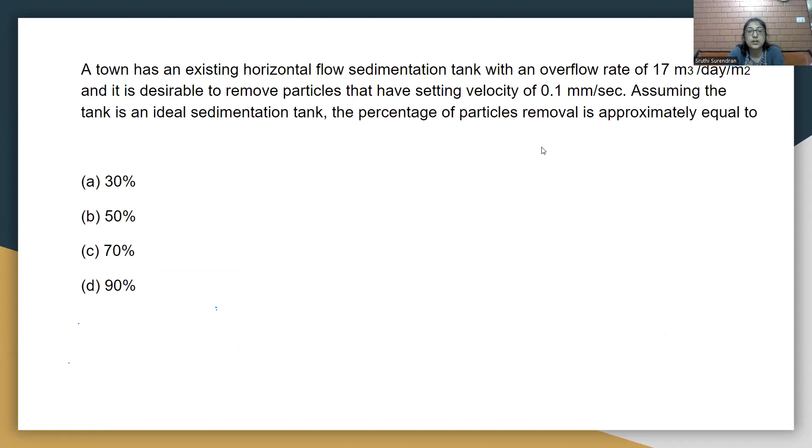Okay, another numerical. A town has an existing horizontal flow sedimentation tank. The surface overflow rate is given as meter cube per meter square per day. And it is desirable to remove the particles having a settling velocity of 0.1 millimeter per second. So here they have given us the overflow rate and the settling velocity. If the tank is an ideal sedimentation tank, what percentage of particles is removed from the tank? This is a direct substitution question. You may try it. I'll give 1 minute.

Only thing you need to take care of over here is to change the units, because surface overflow rate is given in meter per day, settling velocity in millimeter per second. So make the units same and then you can get the answer.

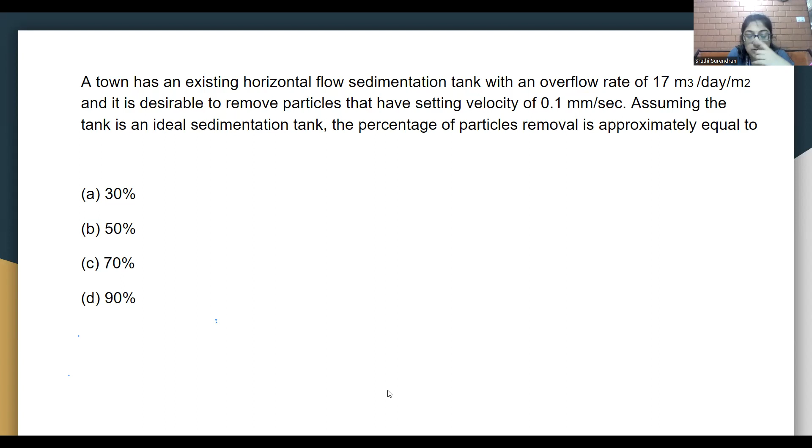Okay, this is a pretty simple question if you had understood the concept that I discussed earlier. Here again, overflow rate is given. It is 17 meter cube per day per meter square. This is nothing else but 17 meter per day. That is converted to millimeter per second, because the settling velocity provided here is in millimeter per second. You will get 0.196 millimeter per second. We know the settling velocity.

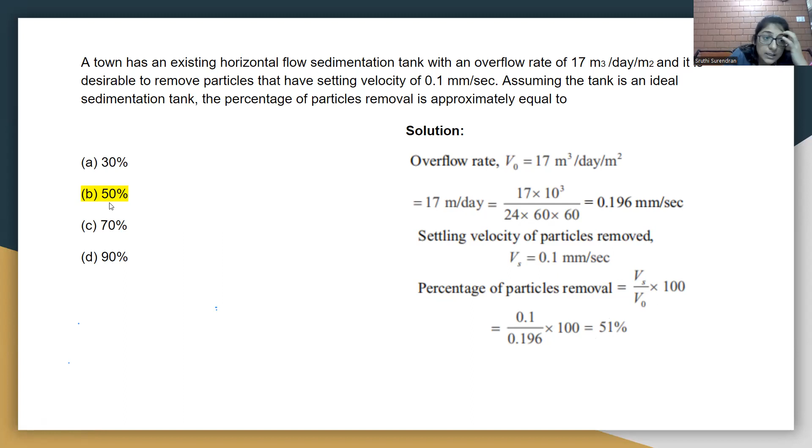I had discussed when the settling velocity Vs is greater than V naught, only then settling will occur. So Vs by V naught is actually giving us the efficiency of the tank, or the percentage of the particles removed. So Vs by V naught into 100 will give the efficiency of the tank, which is the answer we are getting, 51%. So in the solution here, the option closely related to the answer we are getting is 50%.

Another one is again similar to the questions that we discussed earlier. A settling tank in a water treatment plant is designed for a surface overflow rate of 30 meter cube per meter square per day, assuming the specific gravity of the sediment particles as 2.65, density of water as this one, dynamic viscosity of water as this one, and saying the Stokes law is valid. Why they mention Stokes law is valid is because Stokes law is valid for laminar flow, and laminar flow happens when the Reynolds number, rho v d by mu, is less than 1. So only for such particles the Stokes law is valid.

So that is why, if the Stokes law is not valid, settling velocity is calculated using another formula, for which you need the drag coefficient and all. That is there in the slides, the lecture materials. If you go through it, you can read about it. So here they have said Stokes law is valid, so whatever equation we had used till now is enough for calculating the settling velocity.

Again, like the first question that we had discussed in this area, they're asking for the diameter of the particle that needs to be removed.

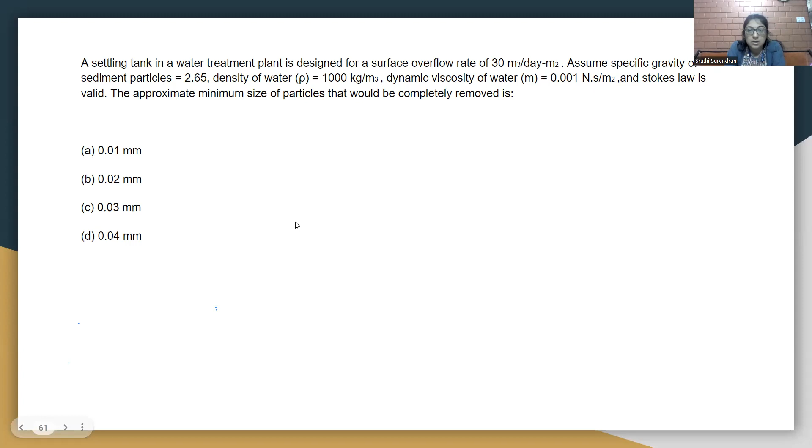So like we had earlier discussed, here the surface overflow rate is given as 30 meter cube per meter square per day. Specific gravity is given, density of water is given, dynamic viscosity is given. Minimum size can be obtained by calculating the settling velocity. In order to get settling velocity, we are taking the settling velocity equal to the surface overflow rate. Why? Because that is when we get 100% efficiency. So since we have the settling velocity, we are going to use that value over here.

So these are some of the points that you need to focus on: the surface overflow rate, settling velocity, under what conditions Stokes law is valid, Stokes law's formula, what is the removal efficiency or efficiency of a tank, the relation between kinematic viscosity and dynamic viscosity, and how to use it in the formula. The units, you have to be very careful. Often units are going to be in meter per day, millimeter.